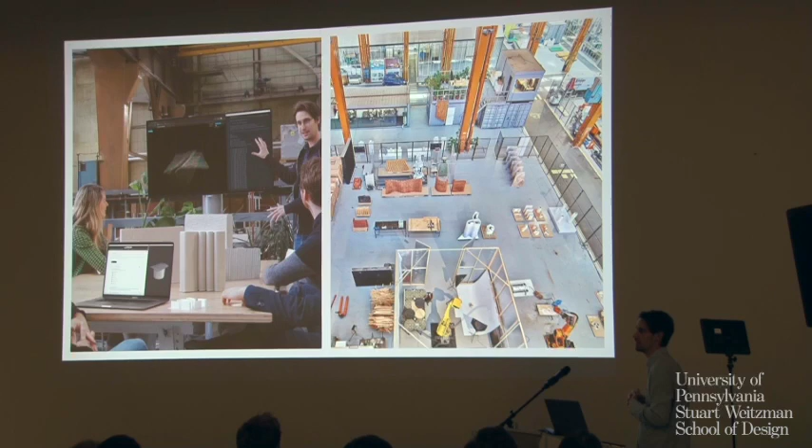On the left you see our team figuring out geometries and designing it. And on the right side, we have a nice playground in Rotterdam with multiple robots where we can experiment with different building techniques.

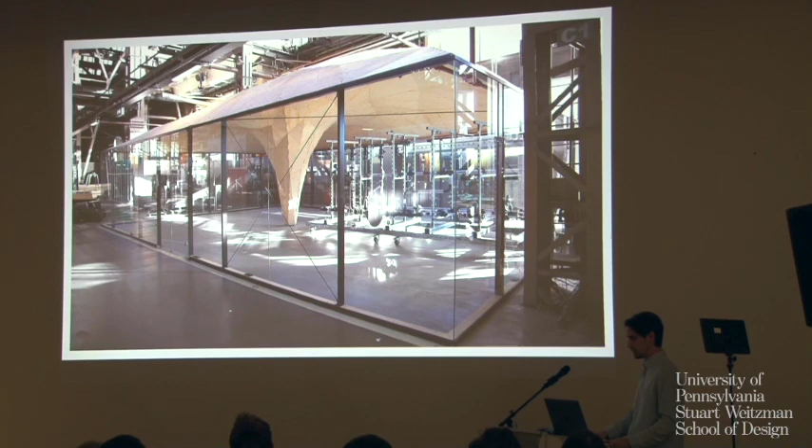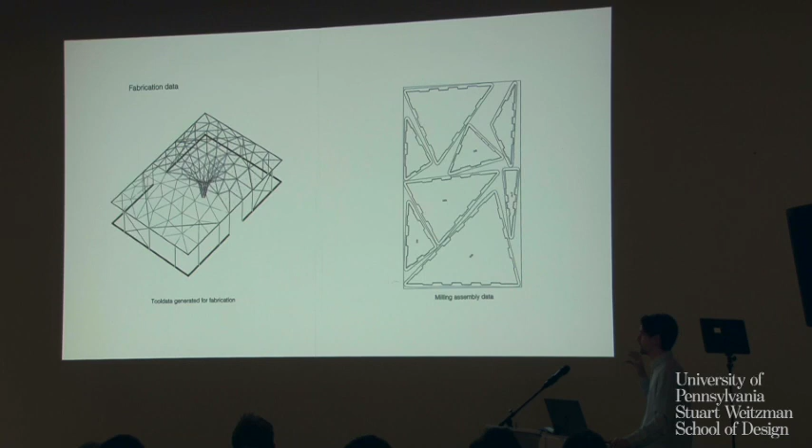So this is our first project. It's made out of Metsä Wood, like layered timber panels. We got a great opportunity from the Port of Rotterdam to create this indoor office. And we just decided to design it and build it for 50,000 euros.

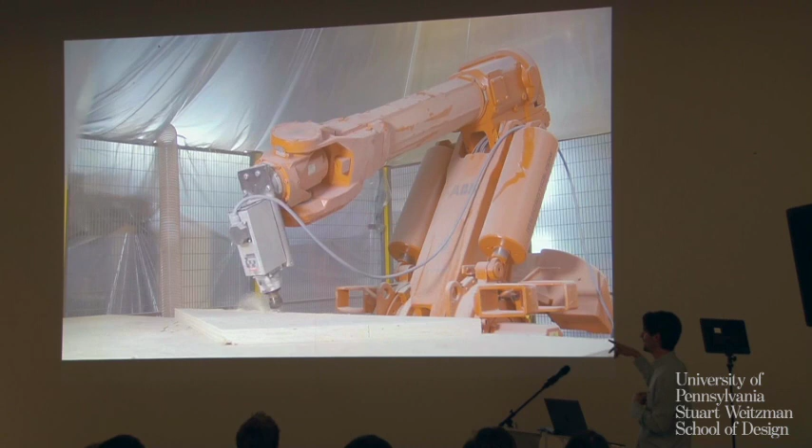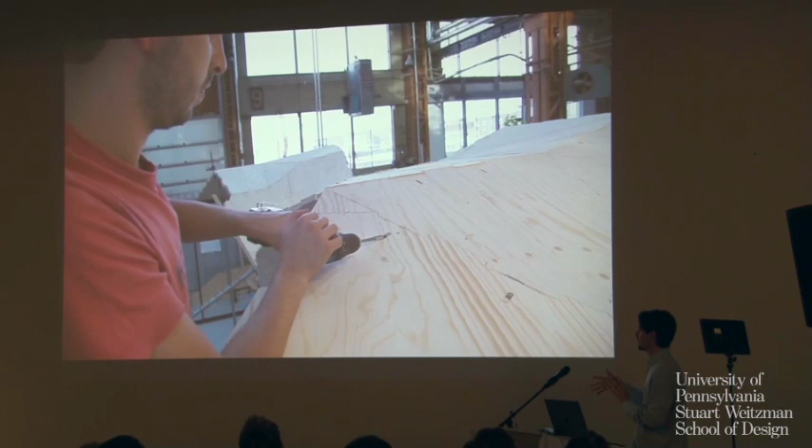It was nothing, but we were just out of university, and we thought we could do it for that price. I think only the sprinkler installation was like 15,000 euros, so we totally underestimated the cost. But we milled out all these panels ourselves. We rented a robot, and it took us, I think, 2 weeks designing, 2 weeks fabricating, and 2 weeks of assembly.

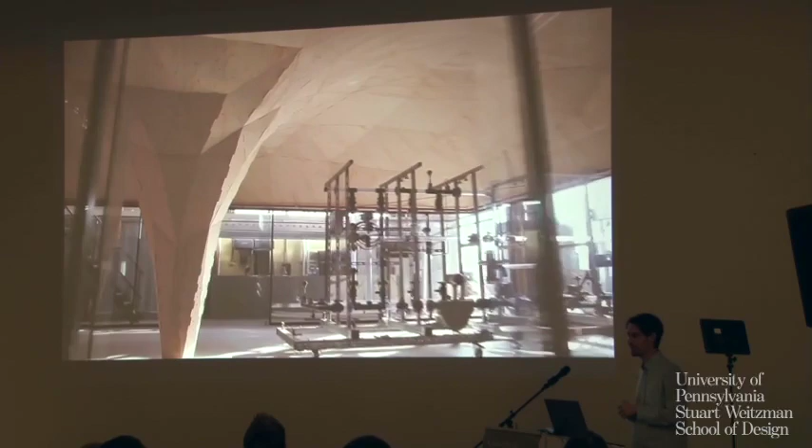And therefore, we could keep the cost down and realize this project. It was a perfect kickstart for our office, because it was published on Dezeen, an internationally recognized website. And with this project, we could launch our company.

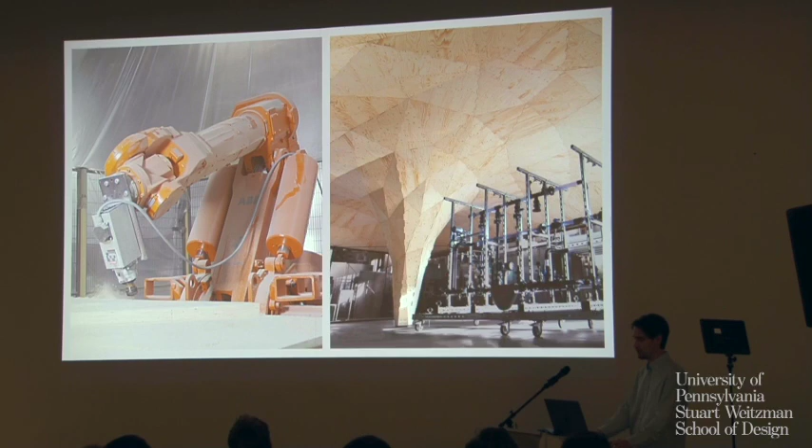About the project, we were quite intrigued by the Rhino Vault plugin in Rhino. So we used this plugin to design the dome. And we also made these screw connections - it was basically not needed, the screws, because it's all compression, but it was easier for assembling it.

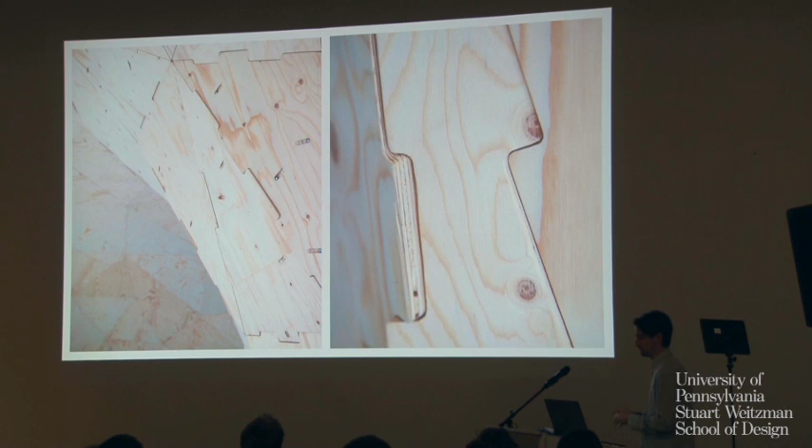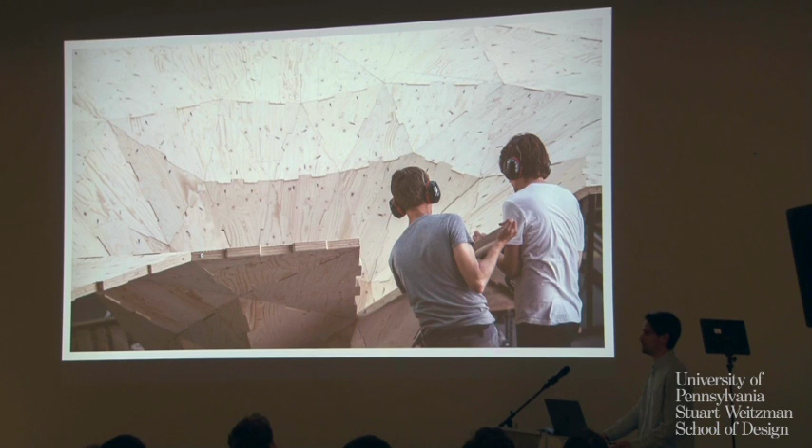And we worked, I think, from 7 in the morning to 1 a.m. in the night to get this project done.

The second project was a balustrade for a Dutch bank, ABN AMRO, and we decided to reuse their waste material of the main structure. It was built with wood. The pavilion was called Circl, so everything should be reused.

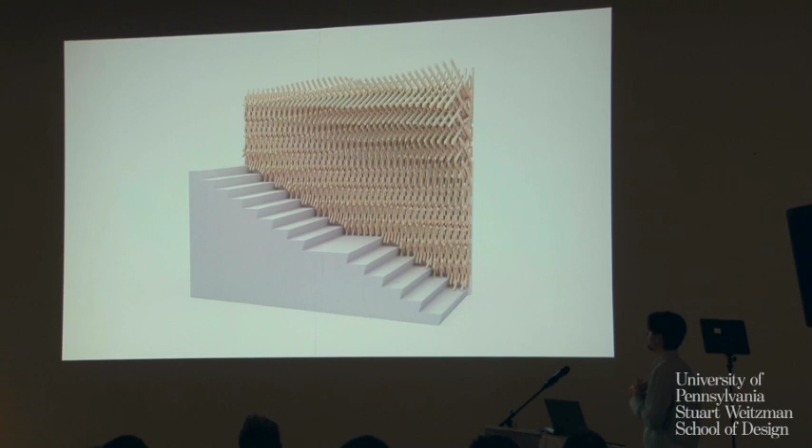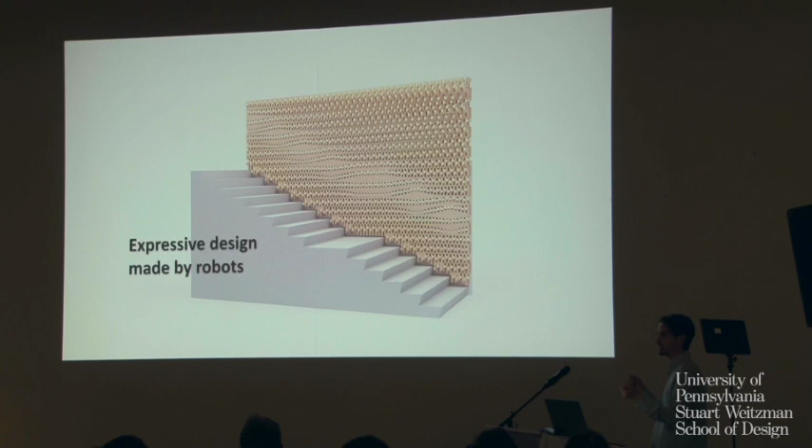We decided to make this robot setup that was cutting those battens into all unique pieces with holes in it to put dowels in, and then post-tensioning everything together. So at a later stage we could disassemble it again. So no glue was used.

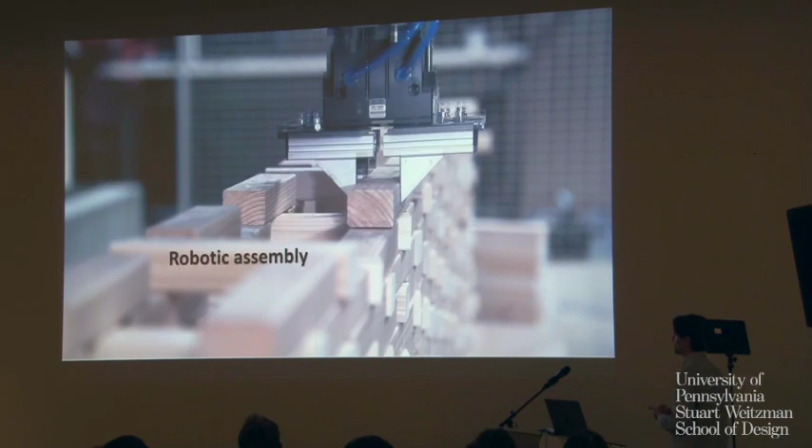But I think this took us a year to develop it. So we developed this whole robot setup. We bought the grippers on eBay. And with this process, we could create these pre-assembled panels in 1 day. So it took us 1 day to create this element.

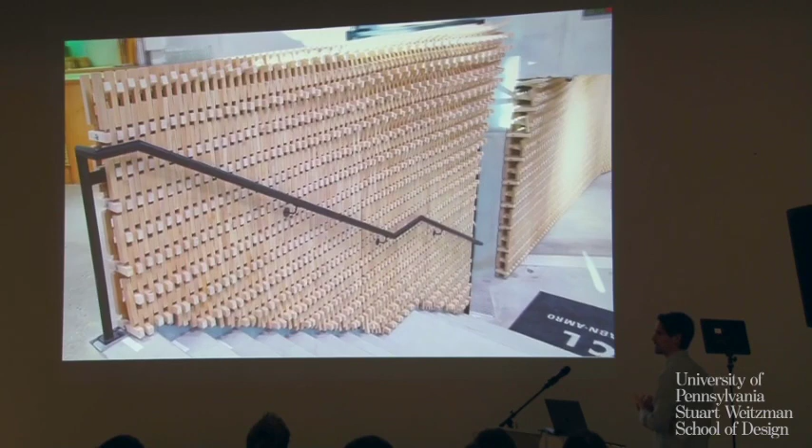And it had to be fireproof, so we coated it a lot. They put salt in it to make it more fire resistant.

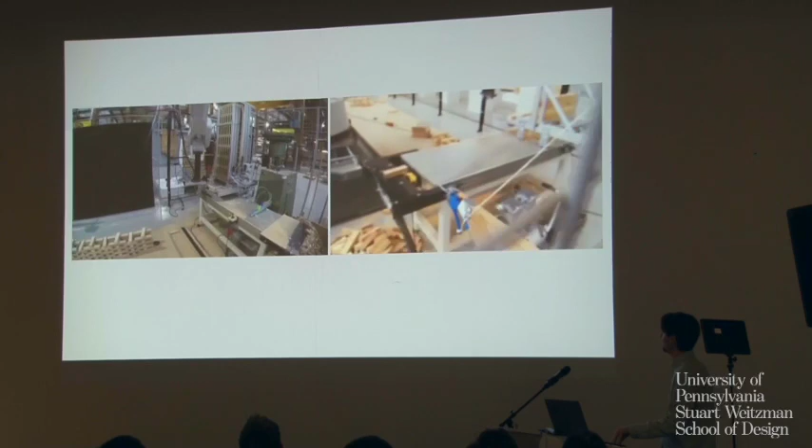And after 1 year of making this setup and experimenting, we decided basically to throw everything away, because people didn't want those elements again. It was just for one project, so we never reused it. So that was a bit unfortunate. And then we were rethinking our business strategy.

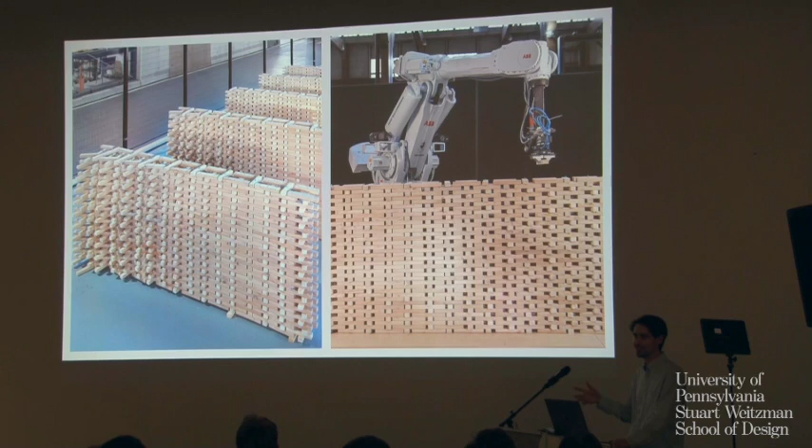So first we were a bit naive, and we thought, okay, for every client we will think up a new fabrication method and design a new project. But nobody's paying for 1 year of research to get this done. Also, the bank didn't pay for it, but we were just too fanatic to work on it and make it happen.

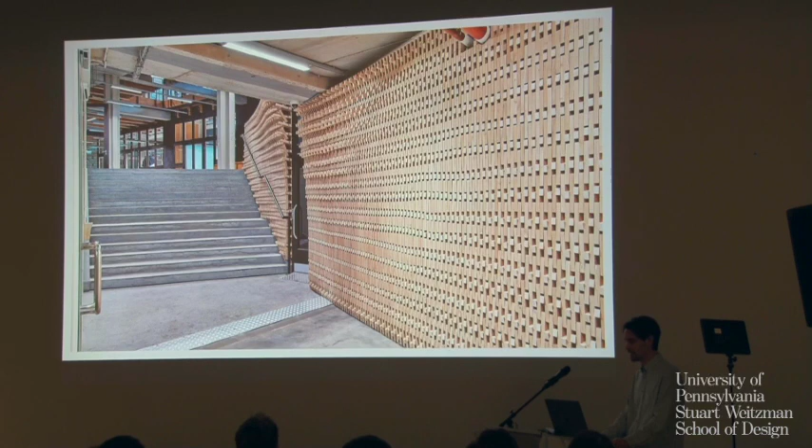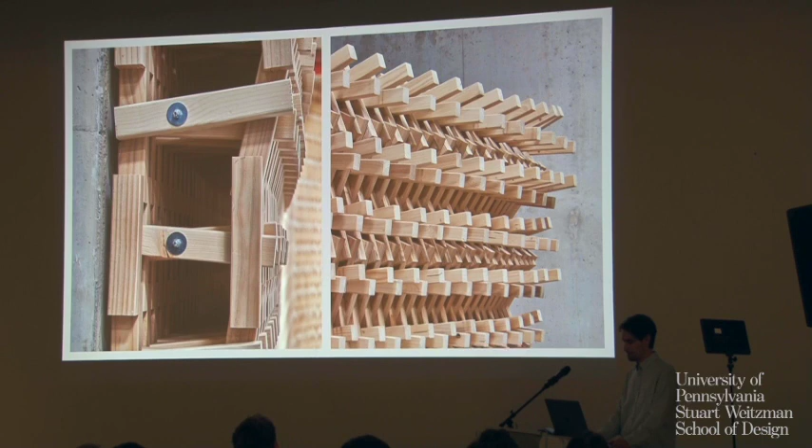This was built, but we never got any other projects out of it, although we learned a lot. For example, these are 10,000 unique battens. So we learned how to program the robot in a certain way that it can do repetitive tasks, but with different and unique elements. We learned a lot from this, and also that we shouldn't do all different kinds of projects.

So basically, we have these projects that are more focused on triangular shapes. It can be in metal or wood, and later we also focused on ceramic printing.

This was a project, for example, the triangle shapes in metal. This was an opportunity - we knew the client of this theater, and he had a budget problem for an interior. We told them that with that budget, we could create something really unique and exciting within the budget. I think this project was done in 5 months.

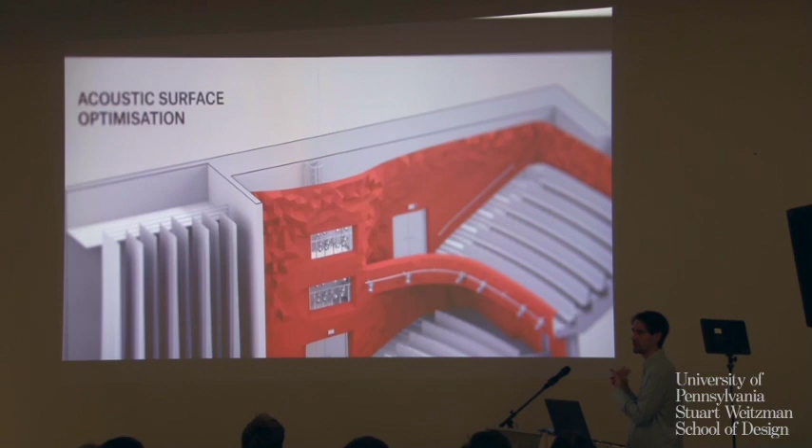So from start, the talking, to delivery, we collaborated with Arup on this project. We developed this mesh where we could influence the triangulation and the roughness of the mesh, and we gave those parameters to Arup. They sent us the informed model, or did iterations on how the model could be shaped in such a way it should be acoustically optimized for that space.

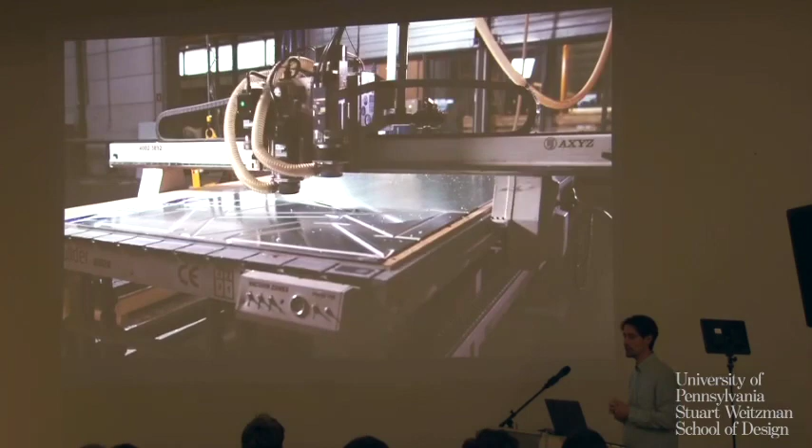We had a nice relation with a factory in Rotterdam that was producing these metal elements, although they didn't believe it could happen, because they were making quite standard aluminium or metal sheets. So they trusted us only if we could send our code to their machine. In the end, we were producing all the code for those machines, and together with a mock-up, we could convince the client that this combination of the fabrication company, Studio RAP, and Arup could work.

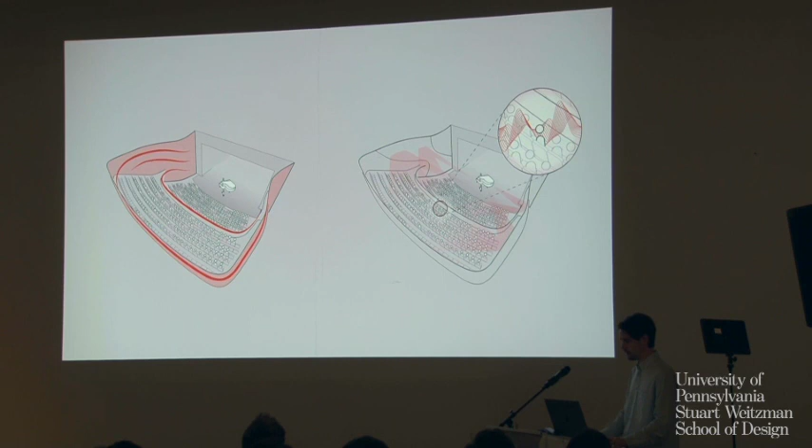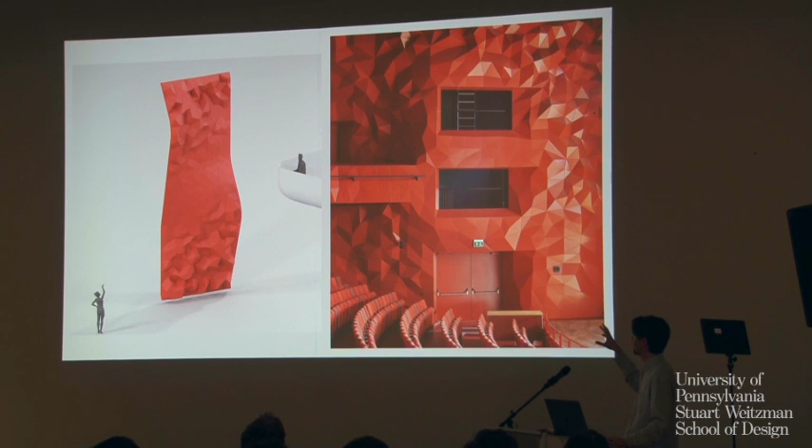Yeah, this is the concept. One of the nice parts of this project was that the production was already started, so the prefabricated elements were already placed, but we noticed that the exit sign was not integrated well. Because we were in control of the production, we could, at a later stage, just change it - we pushed it in slightly to have it integrated better. That's one of the powers of being in control of the whole production process, that you can change things at a later stage.

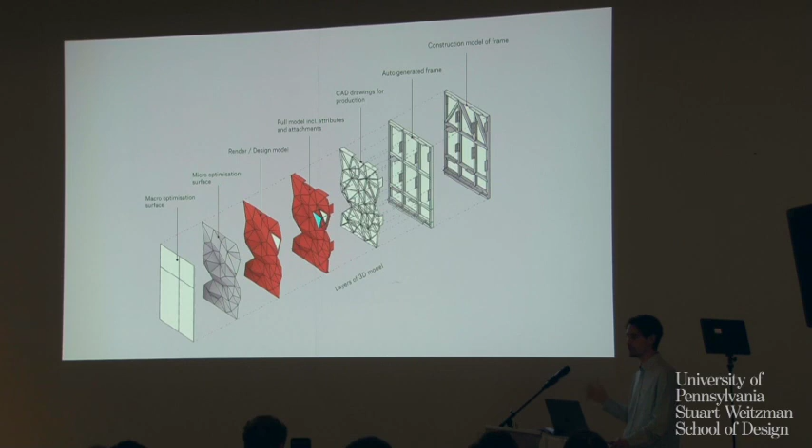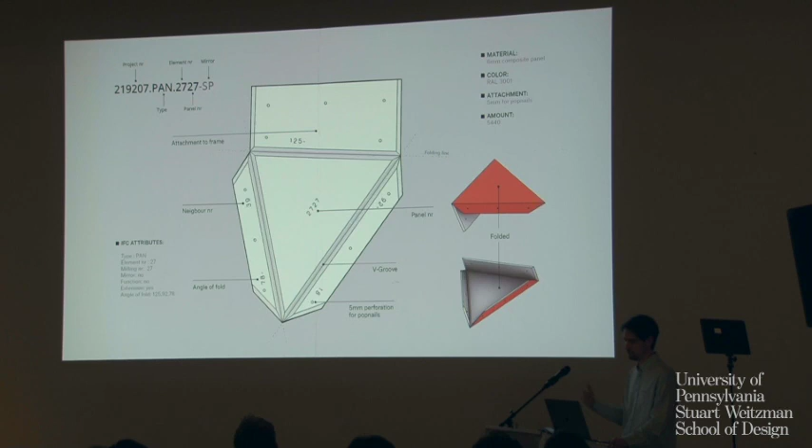All our projects, we have to make mock-ups to convince the clients that it is possible. Also with this one, we spent a lot of time thinking about how we're going to make it, and then we express it in the mock-up and then in the final design.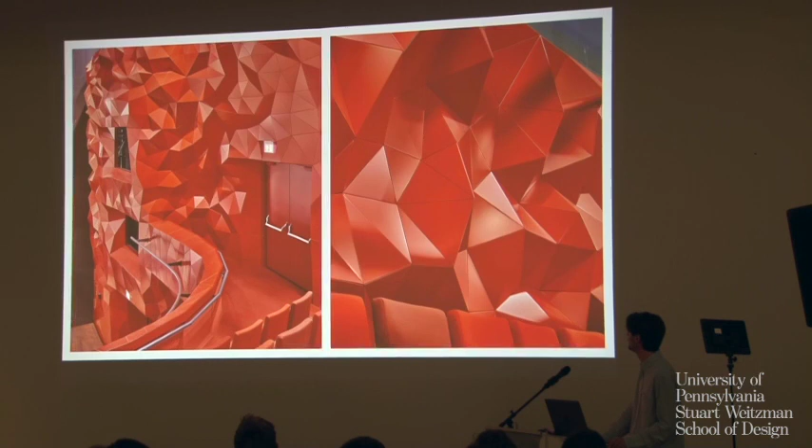So we thought about this project, and then we started thinking about reusing everything we learned from it. We did a small project outside, in the same neighborhood - like a sound barrier for the apartments above. We could just reuse the scripts, change it a bit, and with the same company produce this sound barrier.

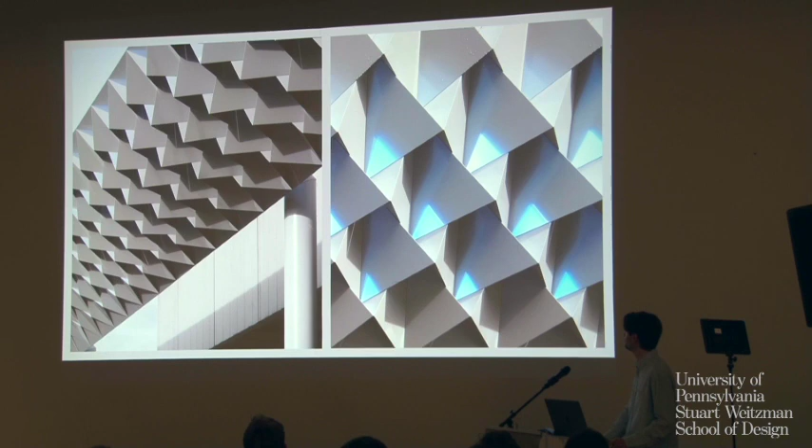And now we're making ceilings for a school in Rotterdam. You see these pockets in the buildings - they will all be clad with a ceiling that we designed. It will be part of the students' curriculum, part of their program, so they can actually program the roof. The school is about media design.

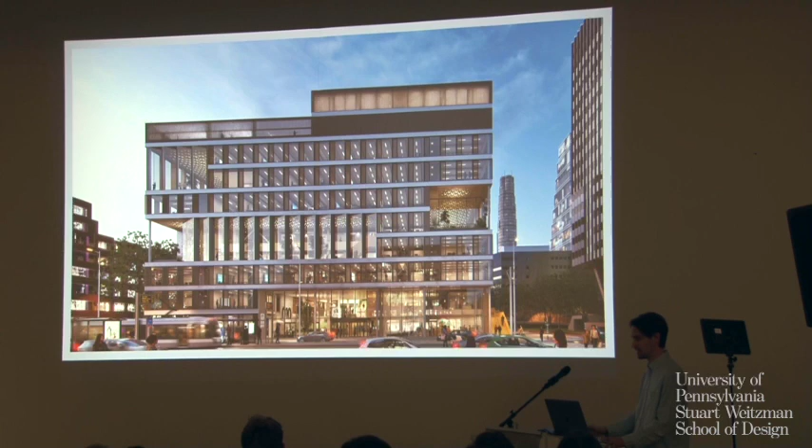So that's also a way we could get extra budget, because it was part of the program. At the end, they could play Tetris or Snake on the ceiling of the school, and during the night you can showcase their work from the outside. We thought, when students walk by, they can show their parents what they programmed on the ceiling - they could hack the school.

This is currently, again, like a mock-up to convince the client how we're going to integrate the lights, the smoke detectors, the sprinklers, etc., to combine everything in a ceiling.

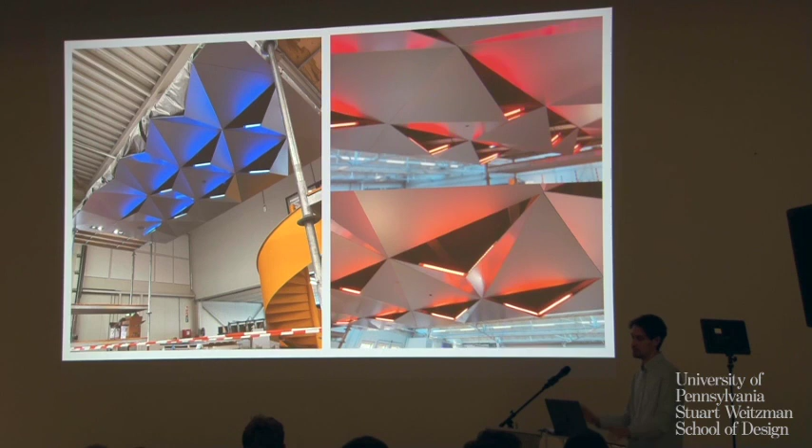This was done in 2022, I think. The client came to us and wanted the most sustainable home of the Netherlands. With this project, we combined CLT, cross-laminated timber, and cork - just those two materials, no plastic sheets or anything - to create this floating home. We made it in a corrugated, or jagged structure to reduce the CLT, creating stiffness through the shape itself to reduce the material.

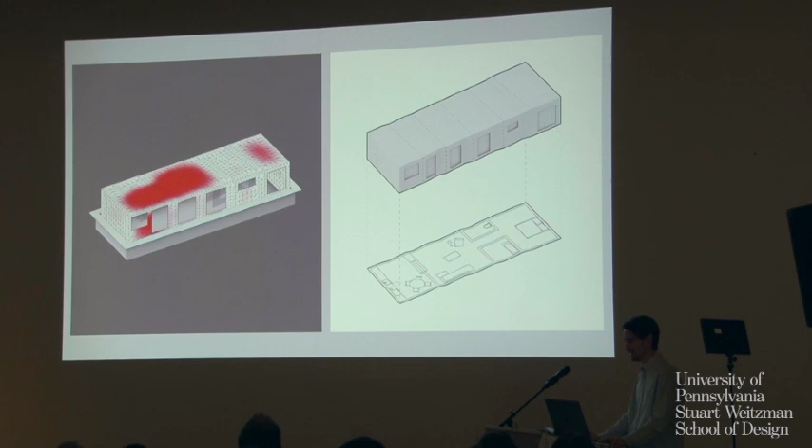Here you can see it. We actually won the most sustainable, or floating home of the Netherlands award, or something like that. They are really happy.

We milled out the foam, the cork pieces. There are two layers of cork, one closest to the CLT. It's less dense, so it has better insulating properties. On the right, it's more dense, so it's stronger.

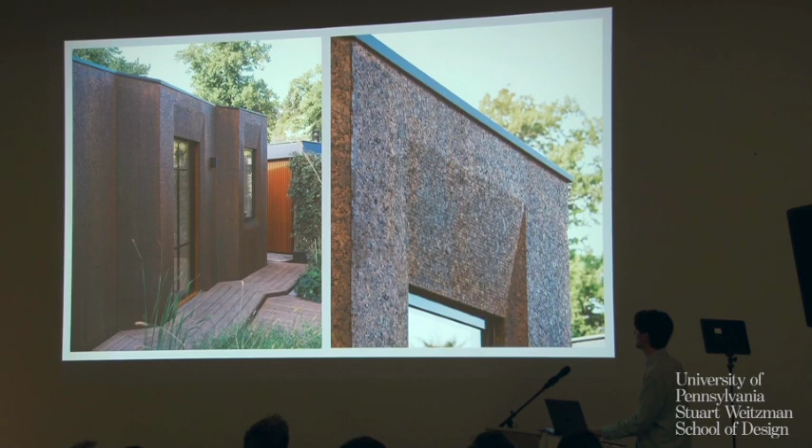So some pictures. We created some reveals, milled out. Everything is CLT from the inside. We really like to work with CLT because you can integrate things nicely. It's great for design to fabrication, because everything is milled out and cut with nice machines. We collaborated with a company in Austria to get those CLT panels delivered on site.

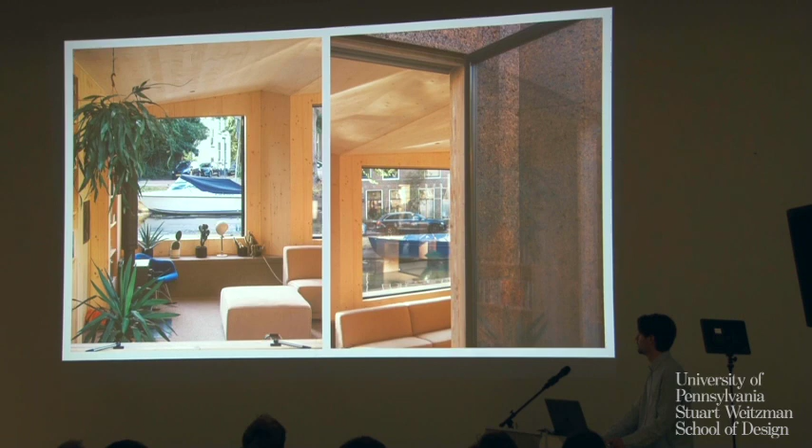It's actually built in one day, so that was great. It's in the city center of Leiden in the Netherlands, so the neighbors were also happy with that. We could integrate the window frames nicely, and everything. Here you can see some of the ceiling, it's like this jagged shape.

In the Netherlands, you see a lot of floating houses on the canals. We tried to scale up this technique of CLT combined with cork. That hasn't happened yet, we did two competitions and unfortunately we lost.

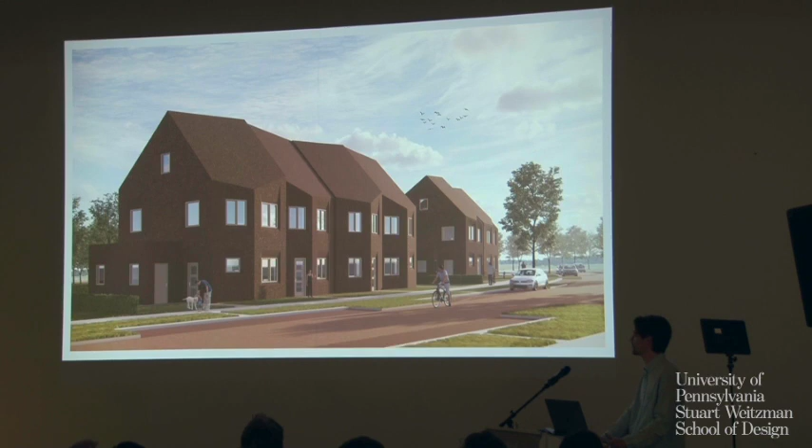Although, the municipality of Hilversum, a Dutch city, asked us to design one parking lot for bicycles, and this bus stop. This will be built next year. We got approval from the municipality, so this will be built. It's a nice continuation of the CLT triangulated projects that we do.

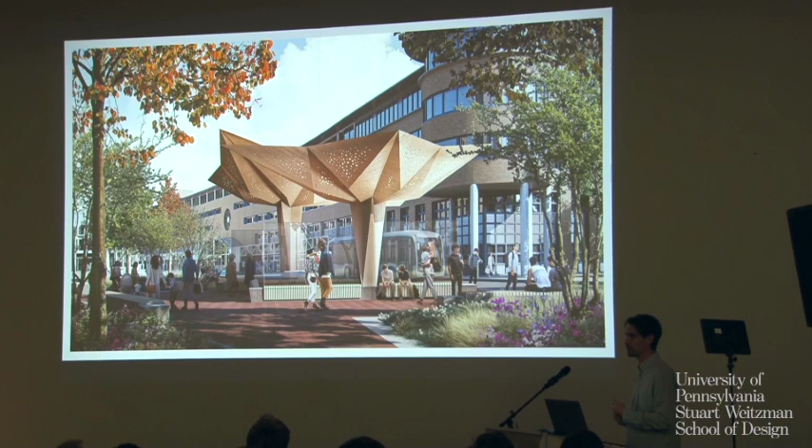This is our first project with ceramic panels. It was, I think, 2018 when we talked with the client. They asked us to design something for two gates of an apartment building in the Netherlands. This apartment block had a courtyard inside, connecting the two gates. You could enter that courtyard with two gates. It is public, but they wanted to have something special.

So we proposed them a gate made out of brick, like robotic brick stacking, which was quite popular a while ago. We also proposed metal sheet bending or pinching, and ceramic printing. This was still the phase where we wanted to experiment with a lot of techniques. They chose ceramic printing.

We sold this project with the idea to print everything, but we didn't have the technology yet. So we had to develop the whole technology. We were quite naive about that, but we thought, a lot of universities are printing with clay, so we thought it was possible.

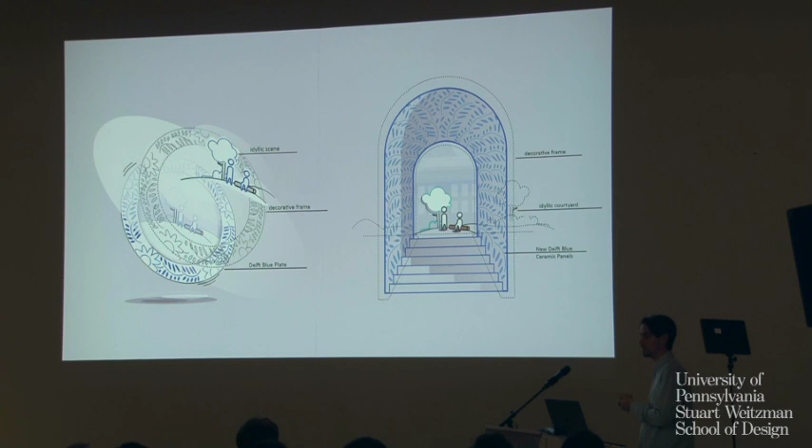With every project we try to tell a story with these ceramic panels, and this is the result. We worked together with Tichelaar, Royal Tichelaar, one of the oldest companies in the Netherlands, 450 years old. It's really nice to work with them.

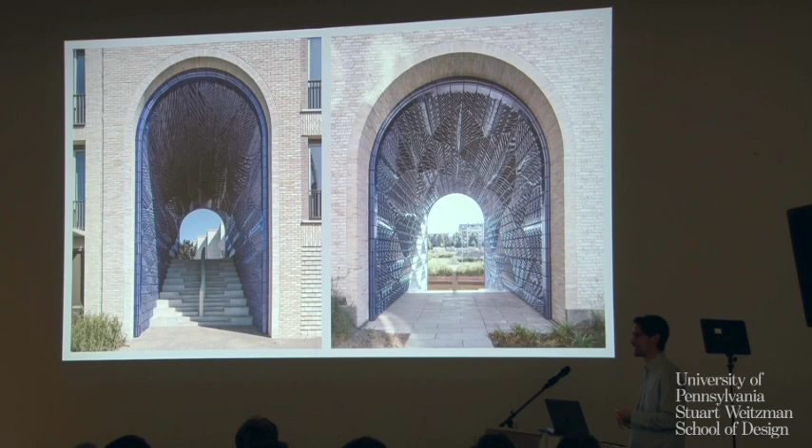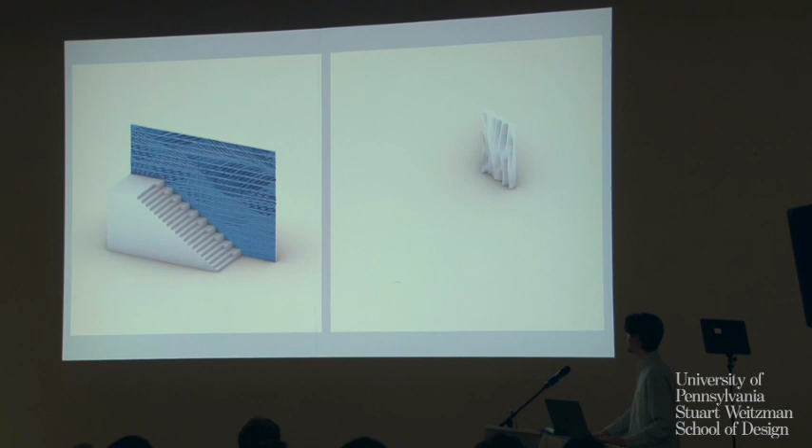They are really analog, so they do everything by hand, and we are the opposite, we would like to automate everything. It's a nice combination. This is how we made the design, based on a pattern inspired by nature, and then we combined the bumpiness of the clay together with the way of glazing, which created these valleys and hills to emphasize the 3D-ness of the panel.

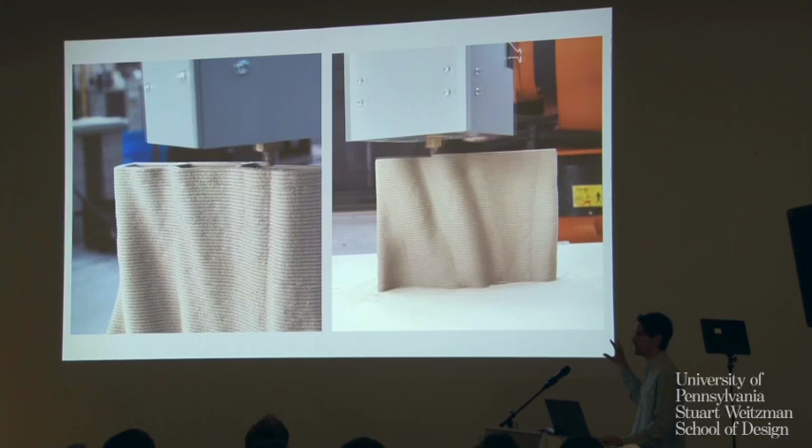This is our experimental robot. This is in Rotterdam, where we could easily change the extruder or change the clay settings.

And this is in the factory of Tichelaar. We developed 2 robots and placed those 2 robots in their factory. People from Studio Rap can work there normal hours, like 8 hours a day, together with those robots. And we can produce 40 of those tiles a day.

Although just producing those tiles, there's a lot of things we have to take into account. Like, these are all unique, so we had to stamp them with a certain number and place them in the right order. So there was a lot of things we had to deal with.

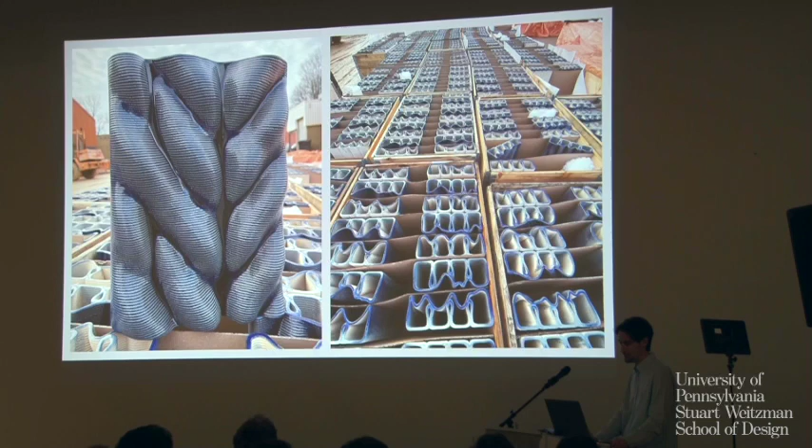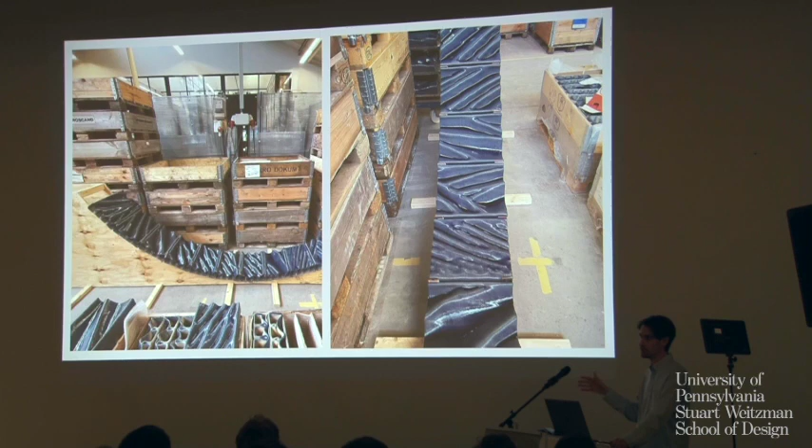This project took us, I think, 4 or 5 years, and the next project took 1 year, and now we're doing a project that takes half a year from design to finish. So it goes faster with each project.

This is like the corner tile, so we try to experiment with certain infill strategies. Sometimes the corner tile is too heavy, so we have to optimize the infill strategies to use less clay, although the right element, for example, is way stronger than the left one.

So we create this family of panels to create a certain design, and all these parameters are within a certain range, so we are confident it can be produced. This setup can produce 3,000 unique panels in this certain design range.

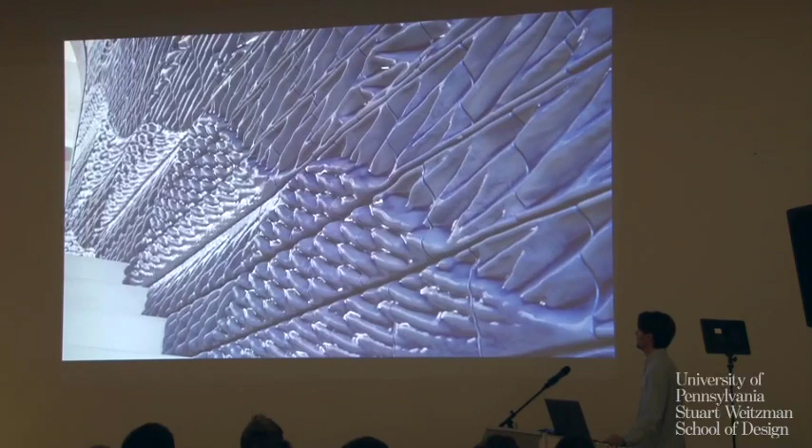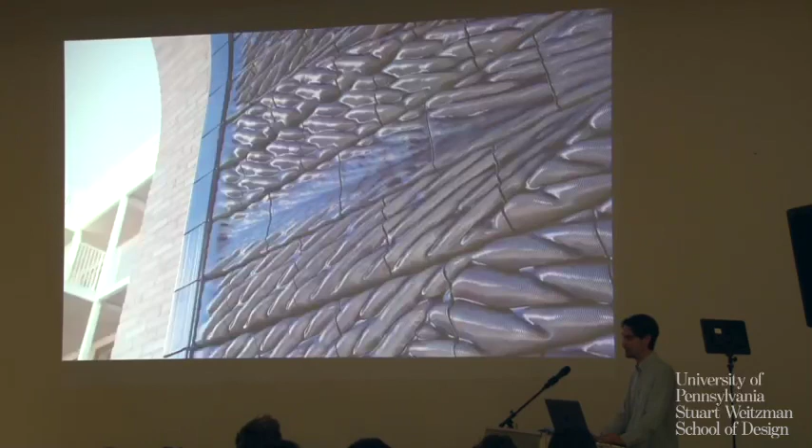This is a video. It's quite a normal building block, but then we put these two gates inside that building block, and it gets a lot of attention, and it's really nice that it's public, so everyone can visit it. Although now they are thinking about putting fences in front of it, but hopefully that will not happen. So this is the design.

I really like the panels that are a bit weird, so you get this clash of 2 types of patterns creating shapes that you will not think of or design. These spontaneous effects of the algorithm - I think we're always trying to find interesting elements that are unexpected or not designed.

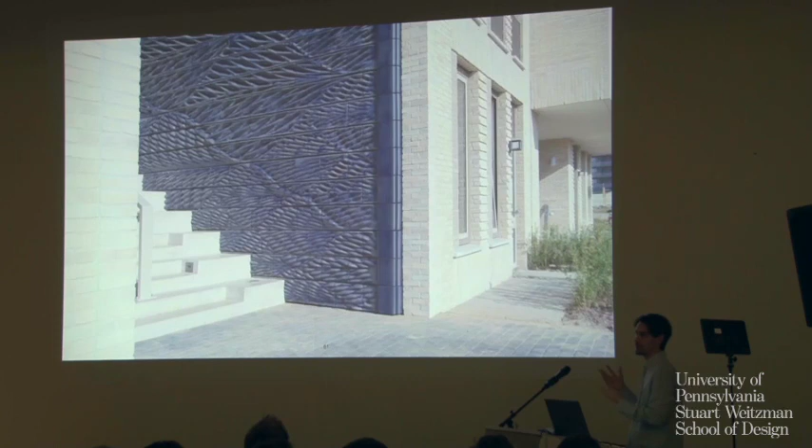Some more pictures of it. It was our first project, so there's still a lot to improve.

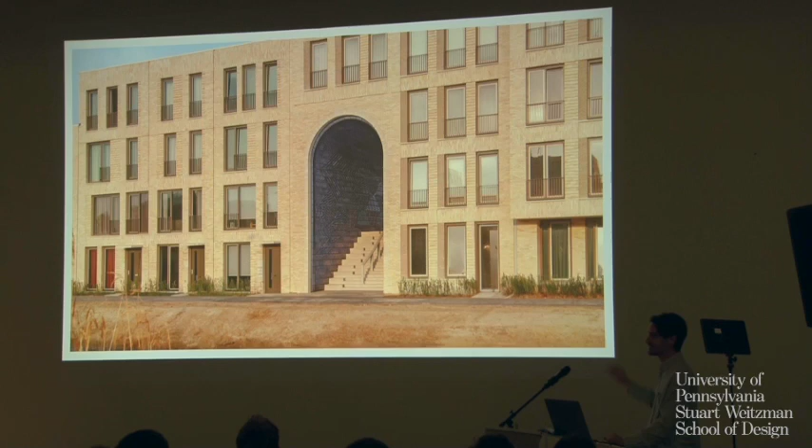So it's quite subtle, but still popping out, if you look closely.

Then we think the previous project was not delivered yet. We had to start the printing of that project, but we convinced the developer to do this project in Amsterdam.

It's a storefront of a high-end shopping brand, on the PC Hoofdstraat in Amsterdam. It's like the Fifth Avenue of Amsterdam, and there are a lot of interesting designs there. For example, the crystal houses of MVRDV, and some stores made by UN Studio. So we're super lucky that this developer gave us an opportunity to develop this with carte blanche, so we could do everything we wanted.

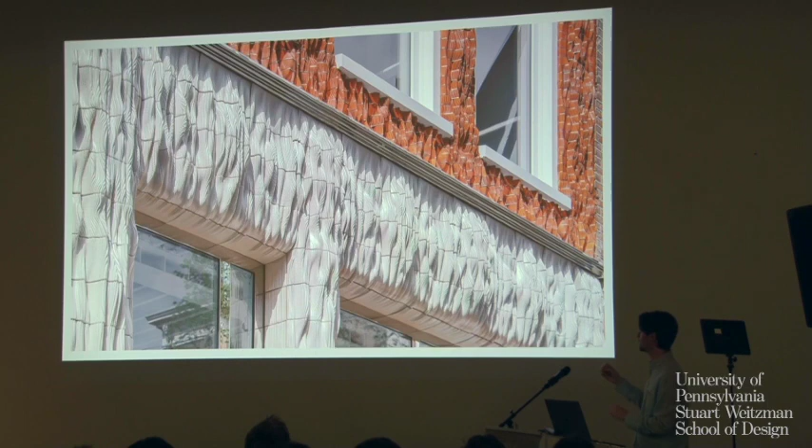So we increased the resolution a lot of the printing. Again, we're trying to tell a story. The concept of this facade is inspired by cloth, because there will be a fashion brand in it.

So we have this multi-layered concept. We use the creases to generate the main shape, and then we have these interlooping yarns, and the stitch pattern on top of these panels.

Also, we had to convince the municipality of Amsterdam to get this project realized. In the front view, you don't see much happening, because we use the same brick pattern as a traditional one. So it's quite subtle in the front, but on the side it pops out and creates a 3D effect. It's flush on the top and more expressive on the side.

That was also one of the conditions to build there - that the top area of the building should be quite subtle, and lower could be more extreme.

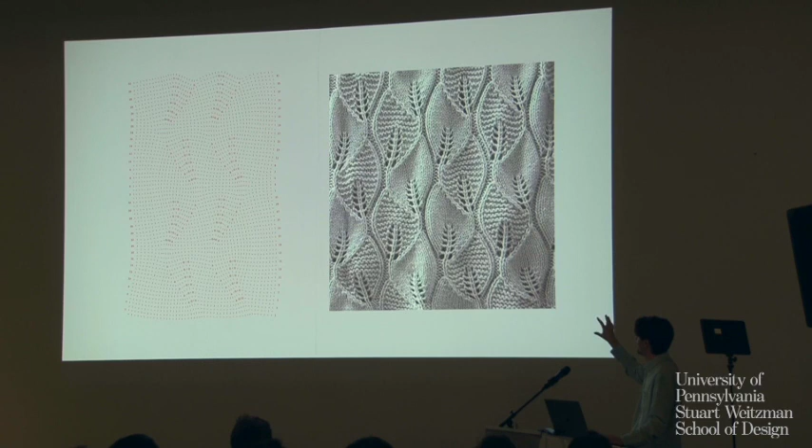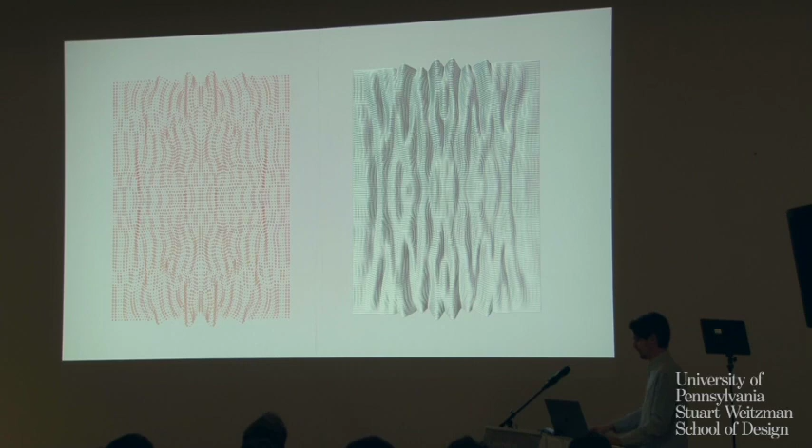So we got inspired by the stitch pattern on the left. This is like input for the machine to create the pattern on the right, when we try to mimic this with our clay printing process to create this language of tiles for this project.

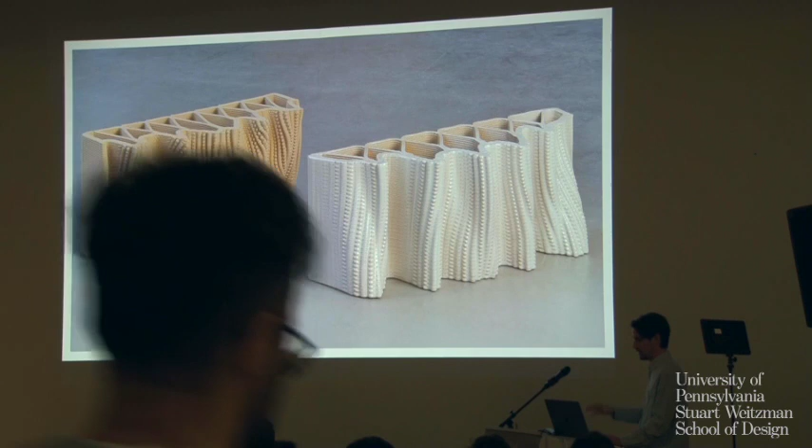And we did a lot of iterations of the high quality of the sticking out of these pearls - we call it pearls - and then the glazing. We had to go maybe a bit more extreme to get the right result, because everything fades away with the glaze. So I really like the left panel, but at the end it has to be glazed to get the really more luxurious effect.

So not only a surface, but we also created some tiles for in between the columns, the reveals.

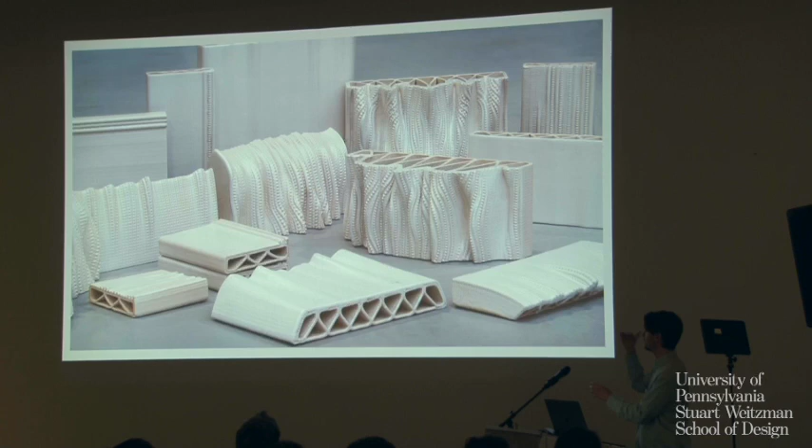We did a lot of testing and mock-ups to convince the client, like how the seams will match. We noticed that clay warps a lot - we didn't know that. So we had to experiment a lot to get the panels as straight as possible.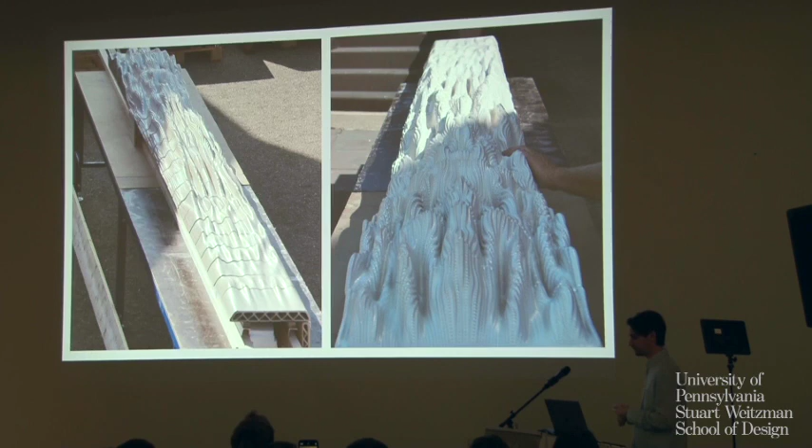This is one of the guys printing daily. The pieces dry for 2 weeks, then go into the kiln, then we glaze them, and then back into the kiln again. The previous project was just 2 weeks of drying and then immediately glazed and fired.

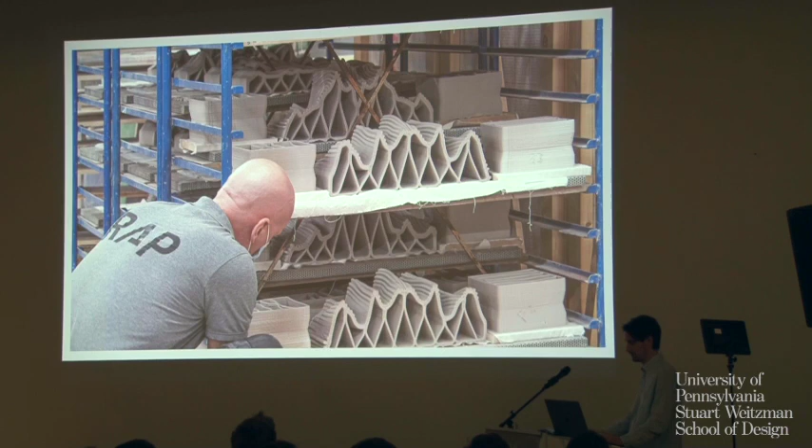With this project, we could actually buy 2 robots. We sold that project, and then we could buy these 2 robots that could also print the other project, the New Delft Blue project. And after printing the New Delft Blue project, we could print out the ceramic house project.

These are meant to be used daily. The operator was actually selling fireworks before his job, and we reschooled him to work for us and handle those robots.

So we made this cell, with all the safety included, and this extruder where the cartridge could be placed, and you could press some buttons. We sent the code from Rotterdam to Makkum, a place in the north of the Netherlands, like a 2-hour drive, all the way to the end of the country—it's a small country. But we could send the code to the robots, and then he could print it out, so we don't have to be there that often.

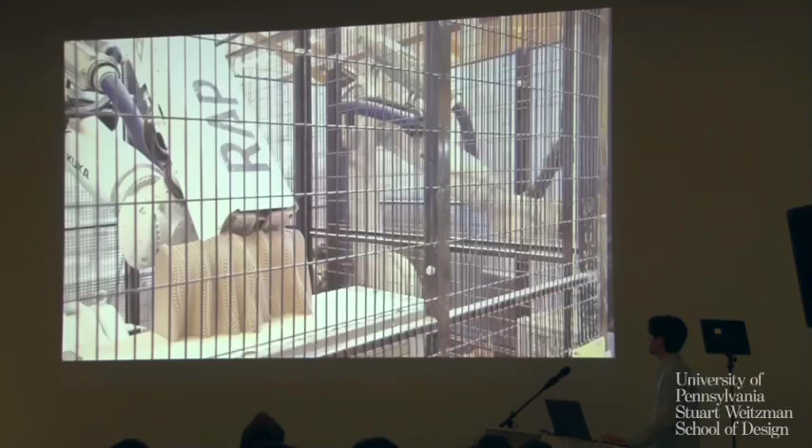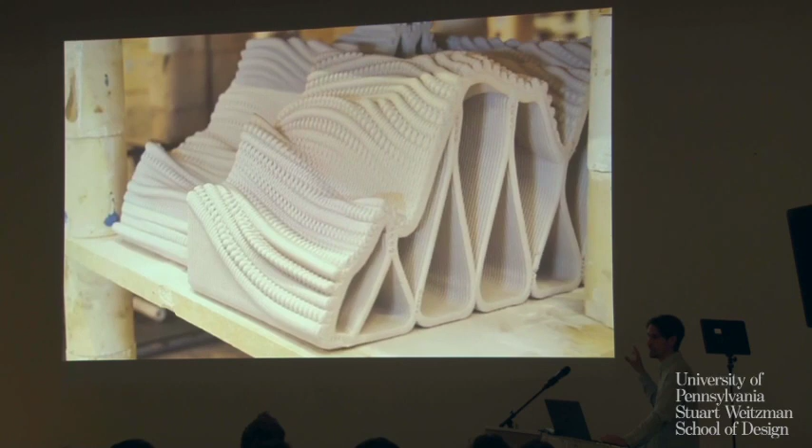So here you can see the two robots working. These panels took 30 minutes to print, and the New Delft Blue project was around 12 minutes. These are quite big—all the panels are around 10 kilos.

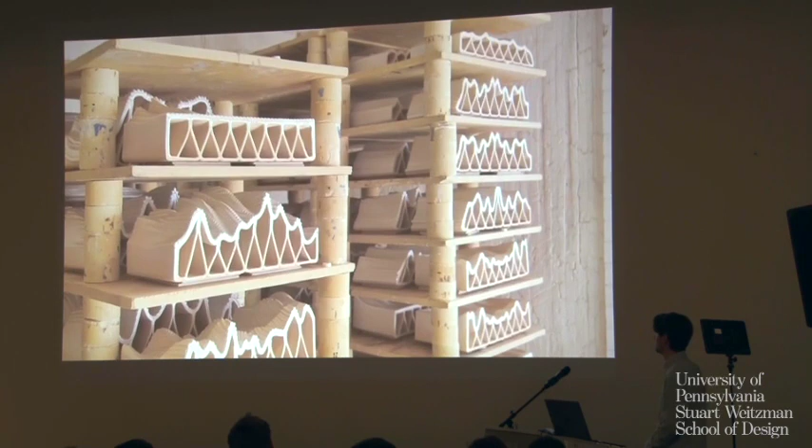I think there's also a video of the spraying process, the glazing. That's all done by Tichelaar, and it's all manual. These are the kilns.

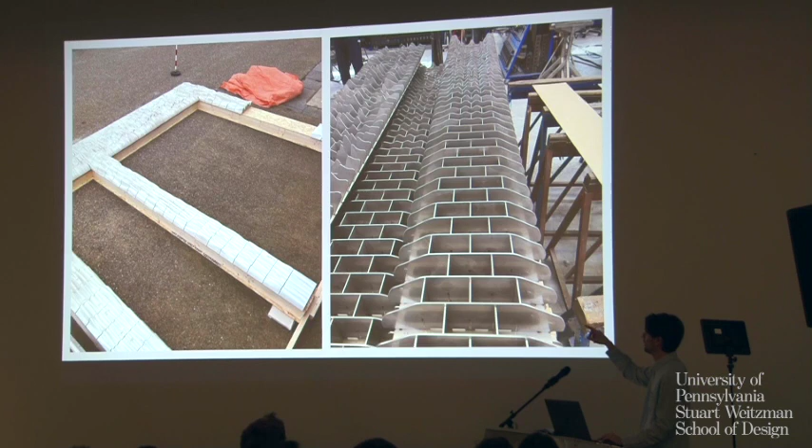The brickwork is placed in stainless steel, laser-cut cassettes, so it fits nicely. The plinth on the first floor, the ground level, is glued. The panels are just glued to the rear structure.

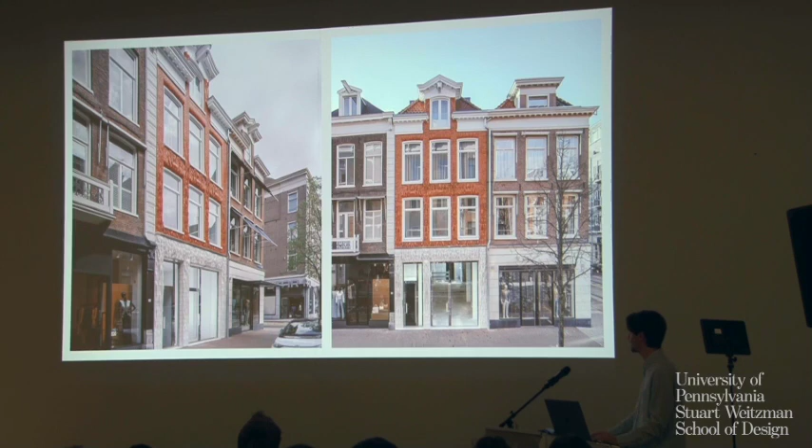This is the result. You can see in the drawing, in the front view, you don't see much difference with the building on the right. So we explained that it's quite a subtle building. When you walk there, it's also not that attention-grabbing, but when you look closely, you see the ceramic panels and you really want to touch it. We also made the door handle in ceramics, so people can feel it when entering the building.

Those pictures—it wasn't the cheapest facade. The stainless steel cassettes were also quite an intensive job.

Some more pictures. With this project, we could get more attention worldwide, and now we're also doing other projects in different countries. It was a really nice opportunity to showcase the possibilities of 3D printing.

These are the laser-cut cassettes. It was a nice replacement for the mortar in between regular bricks, because it's almost not possible to use mortar with these bricks.

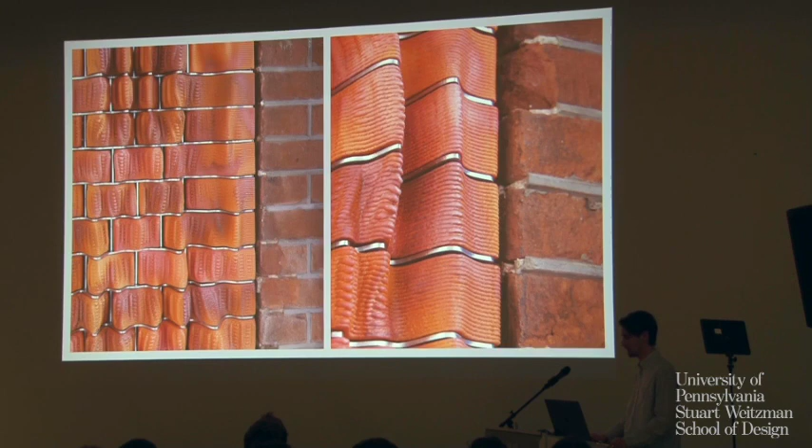We 3D scanned the whole site, so we could align it nicely with the neighboring bricks, the bricks of the buildings next to it. This is a movie that we made.

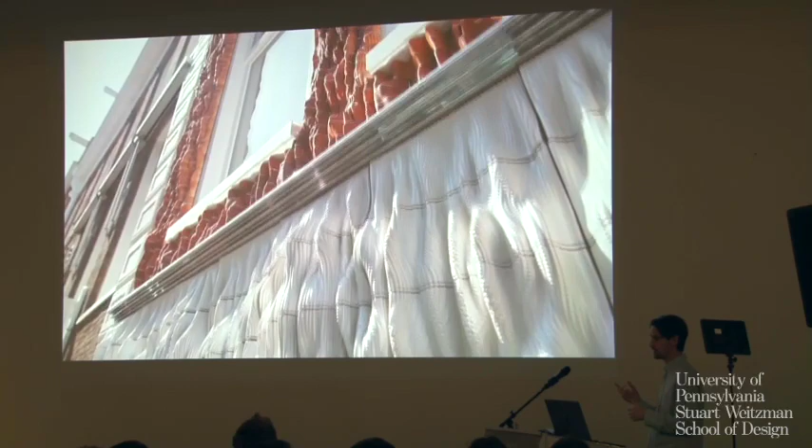The client was quite strict, so after building this, there were some panels that were too deformed, so we had to go there and replace them. Because it's glued, we just used an abrasive wire along behind it, and then we could quite easily dismantle the element and replace it with new tiles. Not the best way, but it was possible.

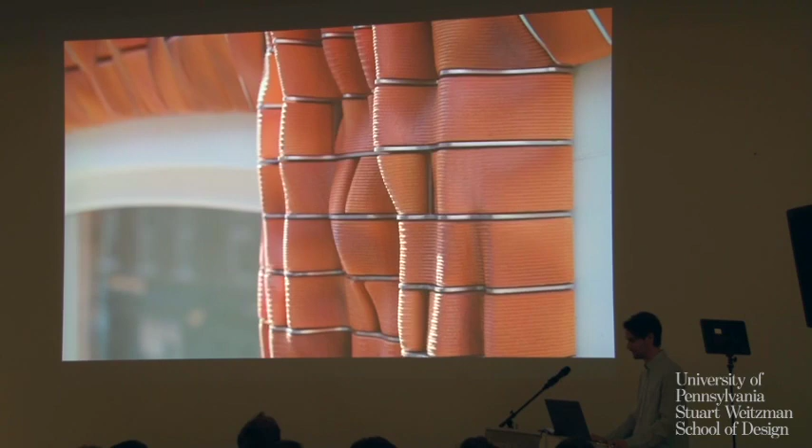This is our second project, and I think the next project will be delivered this summer. We're looking forward to experimenting more with ceramics—we think it's a really nice material to explore and to showcase these computational design possibilities.

That was my presentation.

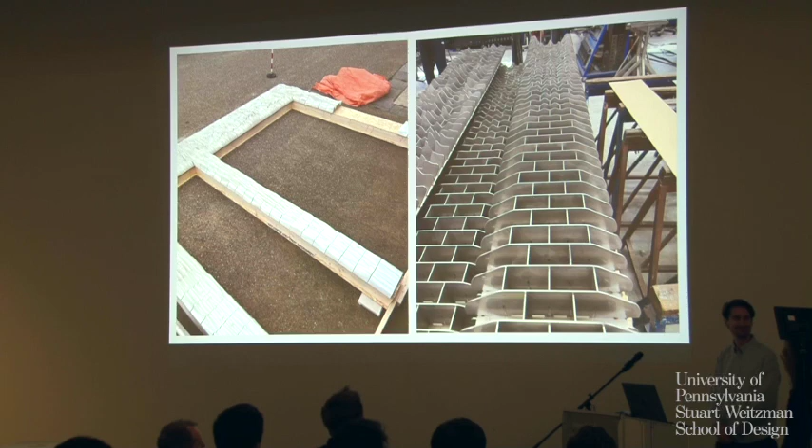So as an exterior facade, and since you're not using any grout, for waterproofing did you have to waterproof the inside layer first? So this entire aperture is not waterproofing, it's like replacing a brick facade, but behind it there's plastic to block the water.

We had to do a lot of tests, also about frosting and defrosting, so it would withstand winter times. We did freeze and defrost cycles like 150 times in special chambers to test if the panels were strong enough, and also hit them with sandbags to get the right strength. In the New Delft Blue project, the lower row of panels were printed with extra infill to make those stronger in case people bump into them with a bicycle or try to destroy it.

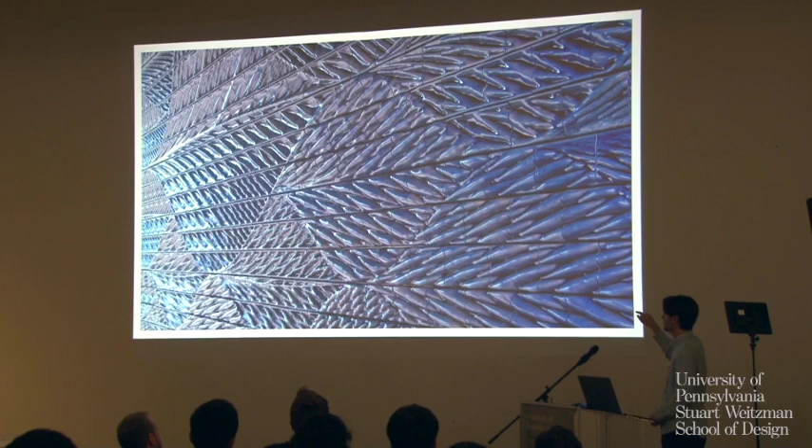Here we rotated the panel, so the width is challenging because of warping. We need to make sure there was enough space between the panels for them to fit, because sometimes they don't shrink that much and become too large to be placed inside. For that project, the contractor was quite conservative and wanted to make it possible to unscrew the panel, so there was space between panels to unscrew it. For the new project we're just stacking them on top of each other, and our margin is about 2 millimeters accurate.

And the shrinkage rate of ceramic, how much is that? The percentage, do you know? I think around 10% shrinkage. Thank you, it's fascinating.

Sorry, I have a question. Regarding the ceramic robot extrusions, did you change the mixture of what went into the ceramics? I imagine the extruder head and the way the material dries - is it the same recipe you'd use for traditional terracotta, or is it a different one you had to play around with to get it right so it could actually extrude?